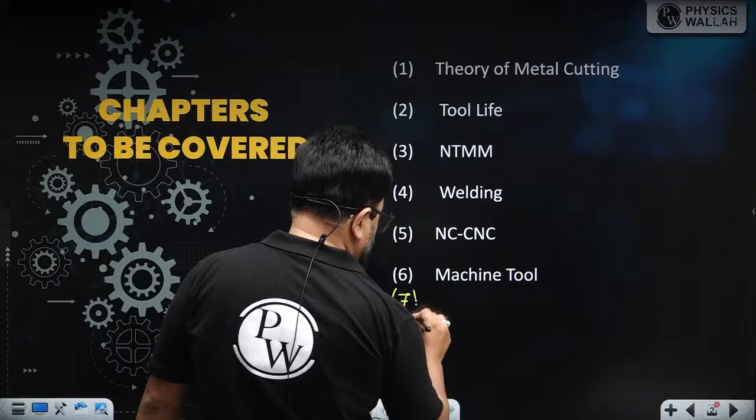Theory of metal cutting, tool life, NTMM non-traditional machining method, welding, NC, CNC, machine tool, and additive manufacturing.

So far you have covered strength of material, manufacturing process part 1, basic thermodynamics. This is for your Maha revision. So far in Super 20 you've covered strength of material, manufacturing process part 1, basic thermodynamics. Today we are going to start manufacturing process part 2. So let's start. Here's your question.

Your time starts now.

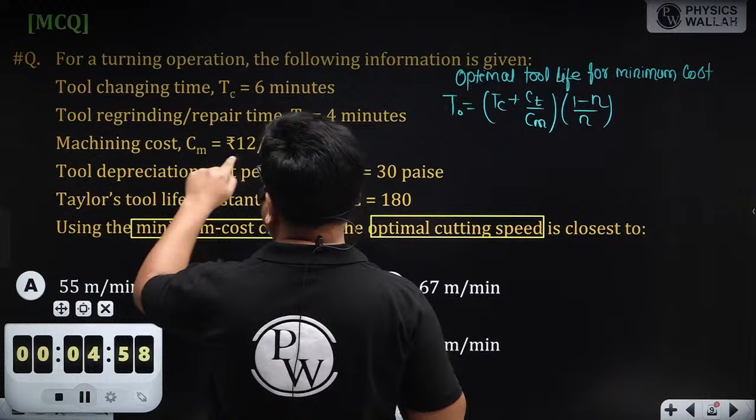Okay, now here CM is given, so let me convert that CM into rupees per minute. That is 12 by 60 rupees per minute, which is 0.2 rupees per minute. Now this is CM.

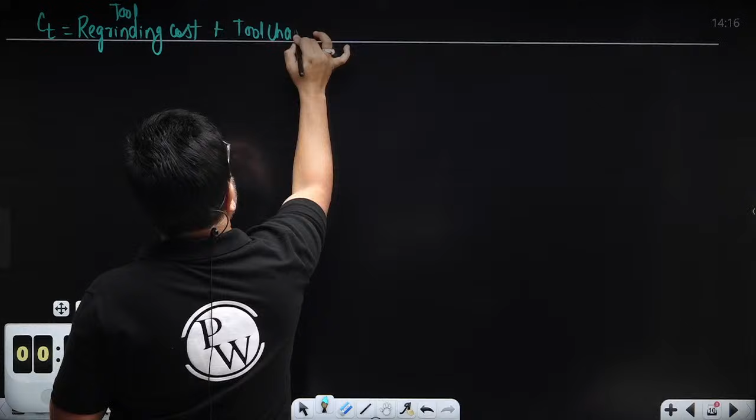Now tooling cost - I told you yesterday what is the tooling cost. Let me write it on a new slide so that you remember, if you forget what is tooling cost. CT, that is your regrinding cost plus tool changing cost plus depreciation cost. Because most of you have not given the right answer, that's why I'm writing this.

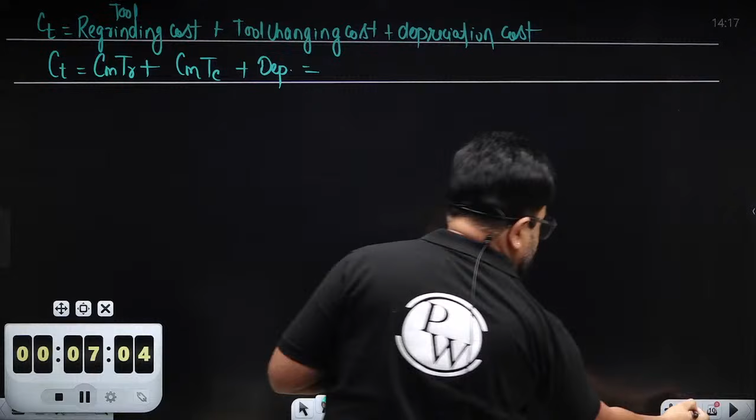Now this is CT. Here, regrinding time is 4 minutes. So who will do the repair? Basically the operator, he will do machining. So CM into TR. Who will change the tool? Operator, basically he is also doing machining. So CM into TC plus depreciation cost.

So CM, that is TR, that is 4 minutes, 0.2 into 4, plus 0.2, changing time is 6, so plus 0.2 into 6, plus depreciation 0.3 rupees, because it is in paisa, 0.3. So 0.2 into 4 plus 0.2 into 6 plus 0.3 equals 2.3 rupees per service.

Okay, now T naught is TC plus CT by CM, 1 minus N by N. T naught tool changing time, that is 6 plus 2.3 cm, 0.2, 1 minus N, that is 0.25.

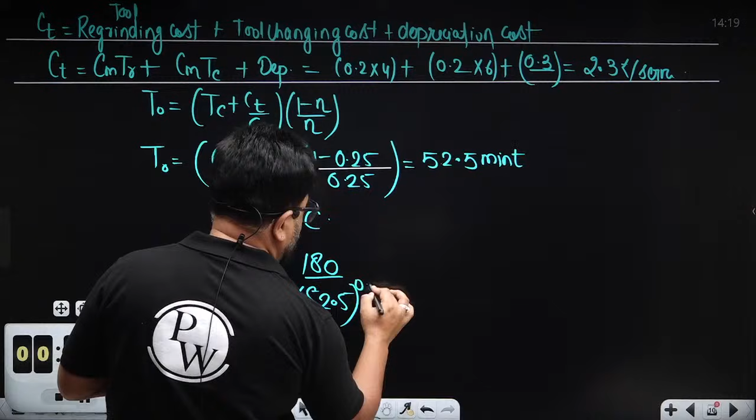So here comes T naught: 2.3 divided by 0.2, plus 6, multiply by 1 minus 0.25, divided by 0.25, that is 52.5 minute per service. So V naught T naught to the power n equal to C. C that is 180 divided by T naught, 52.5 to the power 0.25. So 180 divided by T naught to the power 0.25, so 66.87 meter per minute.

So nearby we can write 67 meter per minute, right? So option B is the right answer.

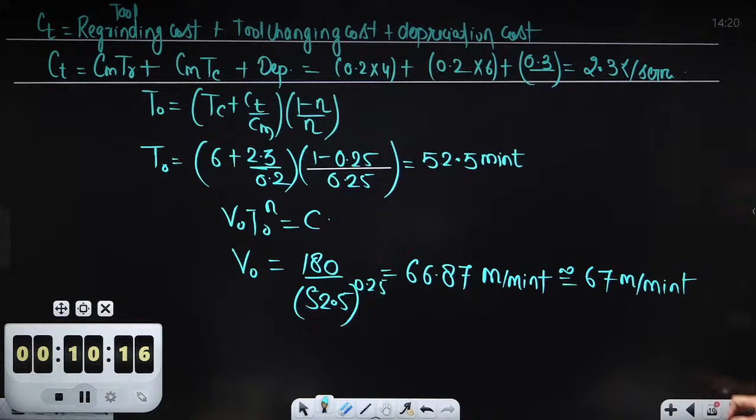Anybody has any doubt? Because most of you have given option C as answer. Aditya, Divya, Swastik, okay, Devapalli, Shiv Kumar, am I clear? And some of them have given option A also - Mukhu, Srivastava, Aditya, Kotawade. Any doubt? I have given the detailed explanation of this question. Any doubt? Shall we move? Clear? Okay, let's move.

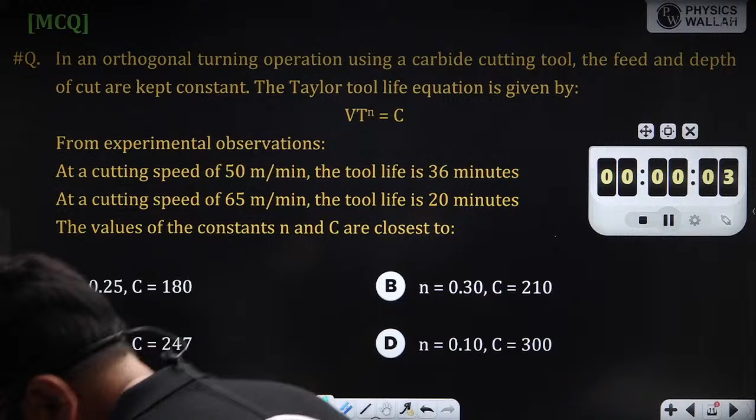This is an easy question.

Okay, Aditya, Kothavade, got it. Thank you.

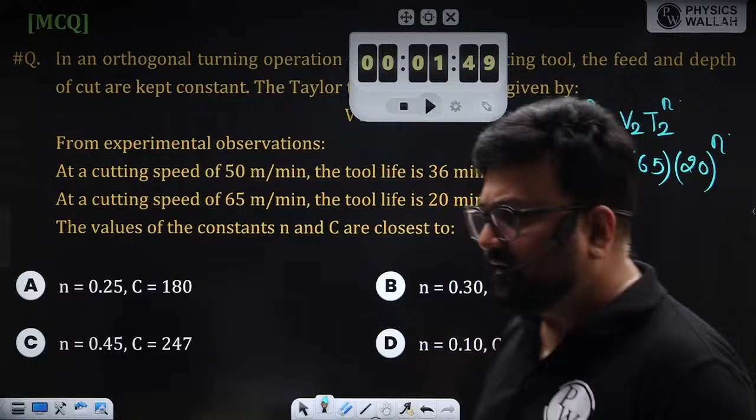You will get the value of n. Once you solve, you will get nearby value 0.45. The exact value is what? 0.446, but when you round it off, 0.45.

Now V1 T1 to the power n. So V1 50, 36, 0.45. The value of C is 247. So option C is the right choice.

You people are doing a good job.

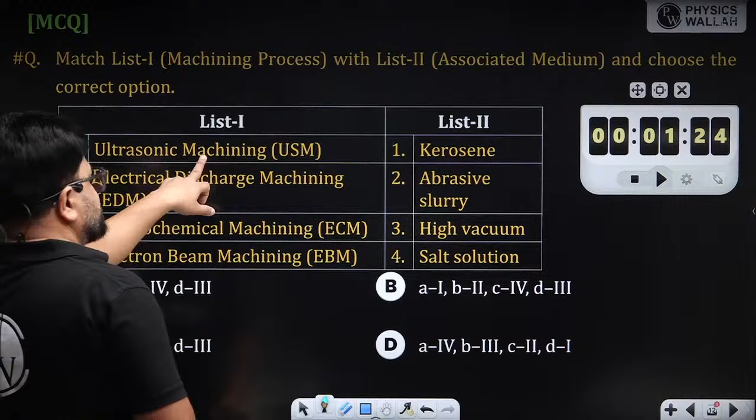Yes, so option A, okay. Ultrasonic machining, USM, you need what? Abrasive slurry, so A2, right? Electrical discharge machining needs dielectric medium, that is kerosene based oil. Electrochemical machining, we need electrolyte, that is salt solution, C. And electron beam machining required - sorry, it is 4 - and we need vacuum. So option A is the right choice. Right? Next.

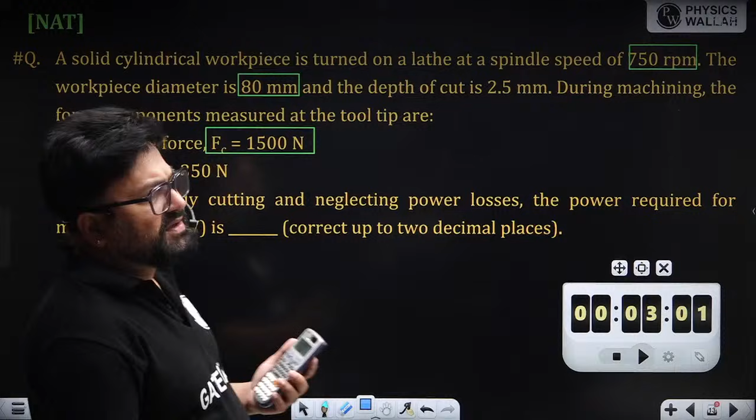It is simple, that is cutting force into cutting velocity. So what is the cutting velocity here? That is pi dn divided by 1000. Pi d, diameter is 80 mm and rpm is 750, divided by 1000. Now this is meter per minute, divided by 60, so it is meter per second.

Now power consumption is what? Cutting force into velocity, that is 1500, pi d n, divided by 1000 into 60. So 1500 into pi into 80 into 750, divided by 1000, divided by 60. So it comes to 4.712 kilowatt.

In this easy question, you people are doing mistakes. Okay, so please pay attention. This is a very easy question.

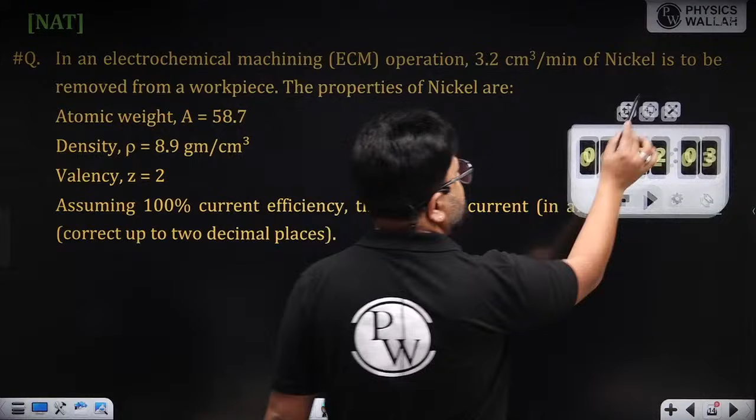Okay. In electrochemical machining operation, 3.2 centimeter cube per minute of nickel is to be removed from workpiece.

The property of the nickel, assuming 100% current efficiency. So MRR equal to I into E divided by F into rho.

That will be centimeter cube per second. Here MRR is centimeter cube per minute. So 3.2 divided by 60 equal to I divide by E, that is atomic weight 58.7, valency is 2, F is 96500, multiply density, that is 8.9, right?

So when you solve, yes, so 3.2 divided by 60, multiply by 96500, multiply by 8.9, divide by 58.7, multiply by 2. So yes, I is 1560.65 ampere.

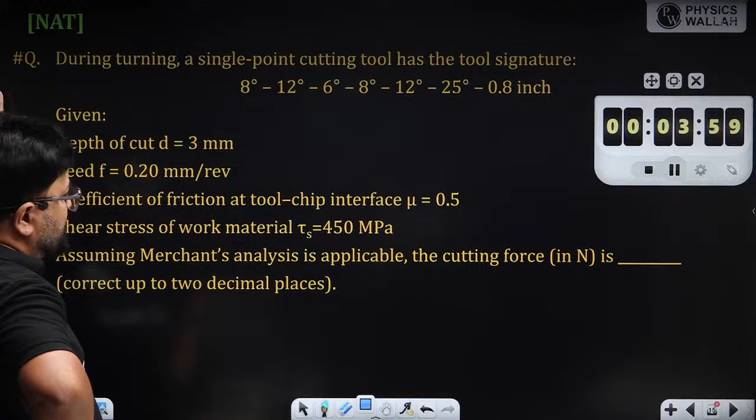During turning, a single point cutting tool has tool signature given. Depth of cut D, feed is 0.2 mm per revolution, coefficient of friction at the tool chip interface 0.5. Shear stress of the work material is 450. Assuming merchant analysis is applicable, the cutting force is.

We need to find the cutting force. Okay, in the comment box, let me know - please tell me which system is that. Is it ASA or ORS? At least tell me in the comment box. Is the angle ASA system or ORS system? Okay, very good, yes, the system is ASA. The system is ASA, very good.

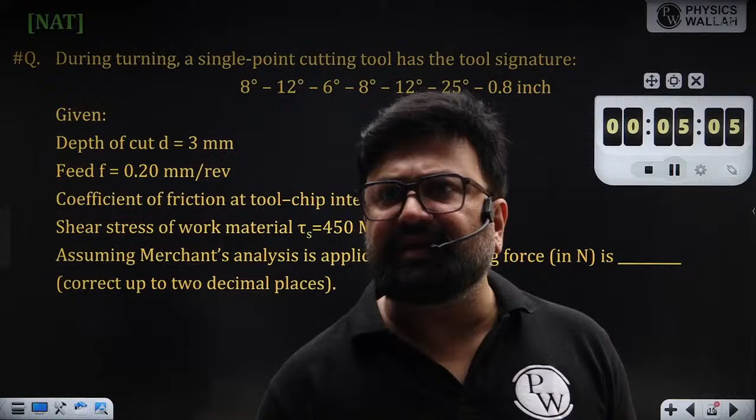So, to find the - because somehow we need the shear angle - okay, somebody has solved 698. I think it is 6 nearby the answer, 698 nearby, not exact, right, Saurav? So please check your calculation again. You are nearby but not the exact one.

So we need the shear angle. For shear angle, we need orthogonal rake angle. We need orthogonal rake angle first of all, then we need shear angle. But in this question, orthogonal rake angle is not given.

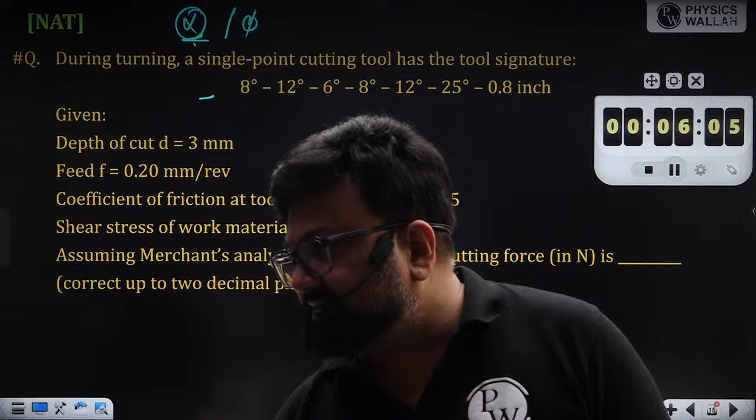So how can we find it? By the interconversion formula between ASA and ORS, right? By the interconversion formula between ASA and ORS. Are you getting my point? So what is the interconversion formula? Tan alpha equal to... so we can write tan alpha equal to

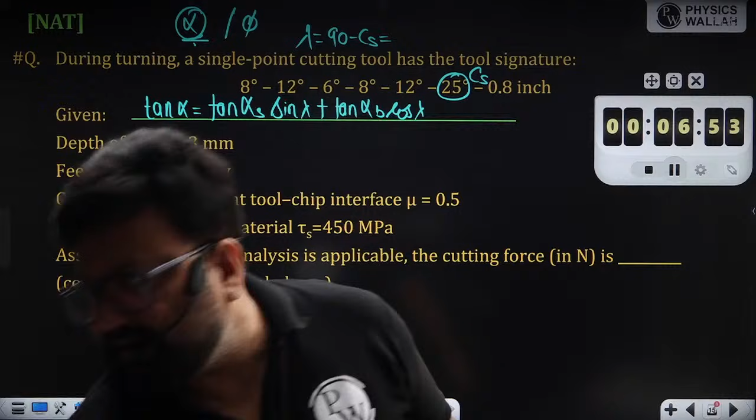tan alpha s, that is side rake angle, into sine lambda plus tan of back rake angle cos lambda. What is lambda here? This is CS. So lambda is 90 minus CS. So here comes your lambda, that is 90 minus 25, that is 65 degree. So when you calculate this, tan alpha...

now this is back rake angle and this is side rake angle. So tan of alpha is tan of 12 and sine of 65 plus tan of 8 cos of 65. So you will get the value of alpha. Tan of 12 multiply sine of 65 plus tan of 12 multiply sine of 65 plus tan of 8 multiply cos of 65, right?

Shift tan inverse of the answer. So alpha is 14.14. Are you getting this? Alpha is 14.146, or if I round off, 14.15 degree. And now we need the shear angle.

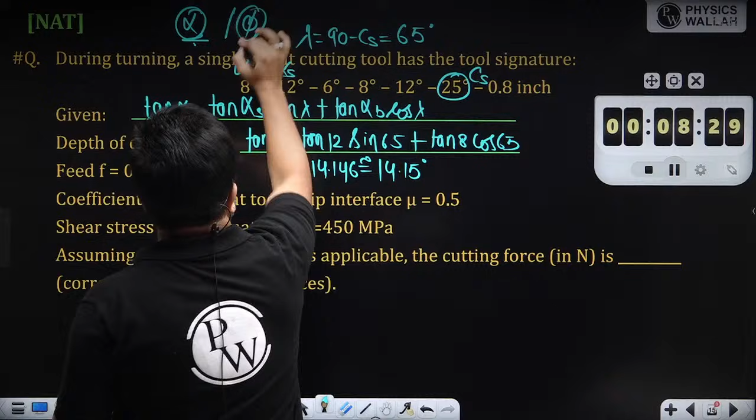But for shear angle, if we apply the formula tan phi equal to r cos alpha divided by 1 minus r sin alpha, there is no r given. So by this formula we cannot calculate phi. So what to do? In that case, it is given that merchant analysis is applicable. So phi is 45 degree plus alpha by 2 minus beta by 2. Here mu is given, so...

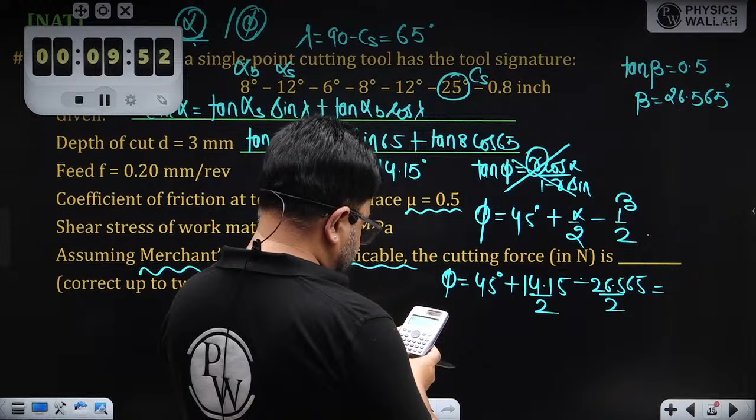you can write that tan of beta equal to 0.5, right? So beta equal to 26.565. So here we get the value of phi: 45 degree plus alpha by 2, that is 14.15 by 2, minus 26.565 by 2. That is 45 plus 14.15 divided by 2 minus 26.565 divided by 2, that is 38.792.

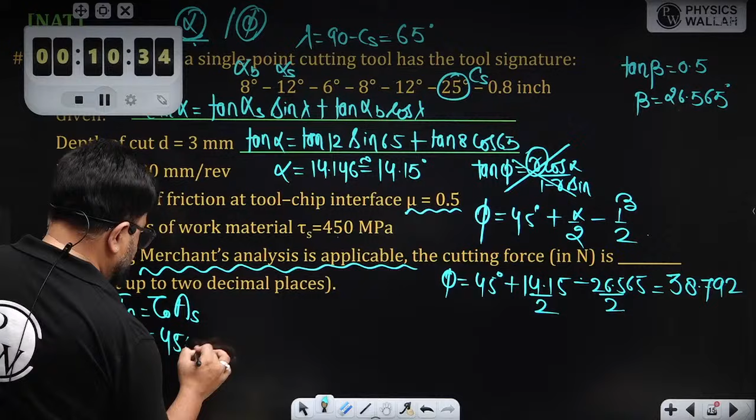Is that clear? Is that clear? So this is the shear angle value. Now can we find the shear force? Shear force is Fs equal to tau naught into As. So tau naught is given as 450 megapascal, that is Newton per mm square, 450. As is what? W T naught by sin phi.

Now depth of cut and feed. Now this is turning, so we can write 450 multiply FD divide by sin phi. In turning we can write FD also. So what is shear force? Feed is given, what is that? 0.2. D is 3. Divide by sin 38.792. So here comes the shear force.

So here it is 450 multiply 0.2 multiply 3 divide by sin of phi, that is 430.964 Newton. Right, now you have the shear force. Now what will be the next step? We can find R, right?

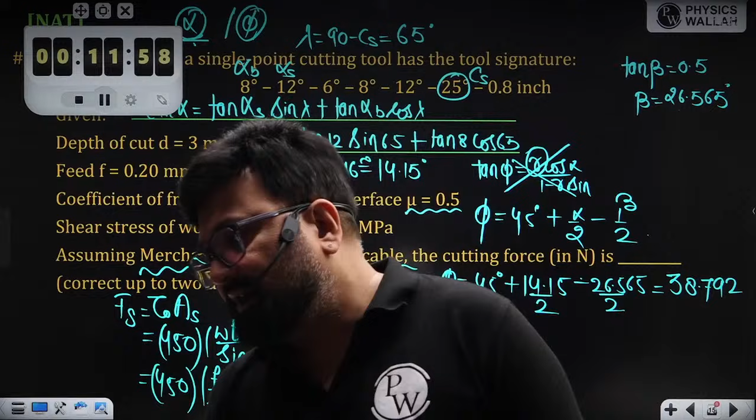We can find the R, and actually what is being asked, let me recorrect, the actual question is the actual cutting force. Is that okay? The actual cutting force, that is what? R. Sorry for the inconvenience. And because you cannot find it otherwise, if you have calculated the R, you have calculated the cutting force.

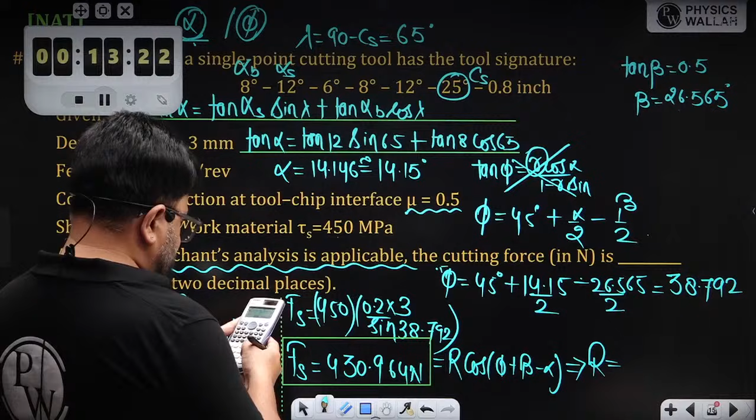Now let me calculate Fs. Fs equal to R cos of phi plus beta minus alpha. So it will give R. So the answer divided by cos of phi, that is 38.792, phi plus beta 26.565 minus alpha 14.15. So R is 687.88 Newton. This is the actual cutting force, but if you are calculating FC, then what is FC?

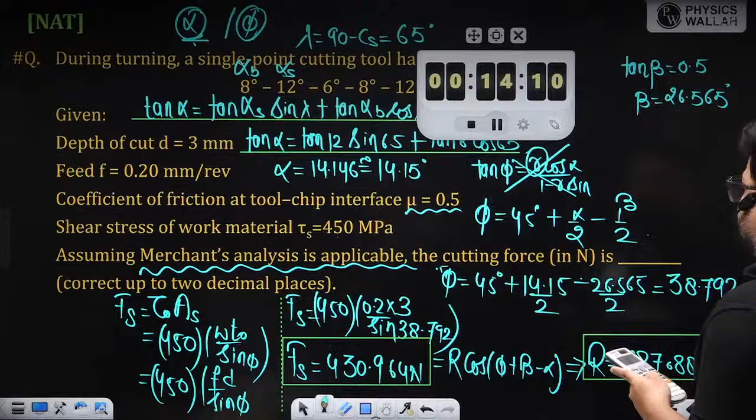FC is R cos of beta minus alpha. So 687.883 cos of beta 26.565 minus 14.15. So this is the cutting component: the answer multiply cos of 26.565 minus 14.15, so 671.797 Newton.

Very good. Is it clear? Is it clear? Everybody?

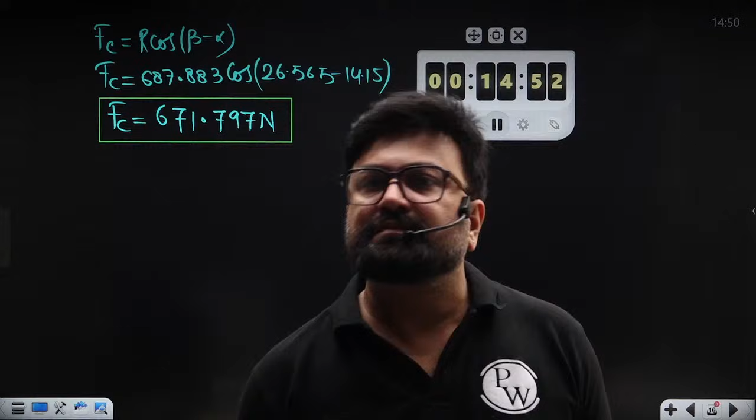Although the question is lengthy, but we need to do practice here. Okay, we need to do practice here. In this question, various formulas come, right? So first is this tan alpha formula. Second is your merchant analysis, right? And third is your merchant circle formulas. So three to four formulas come in this question. This question may be asked in MSQ type also.

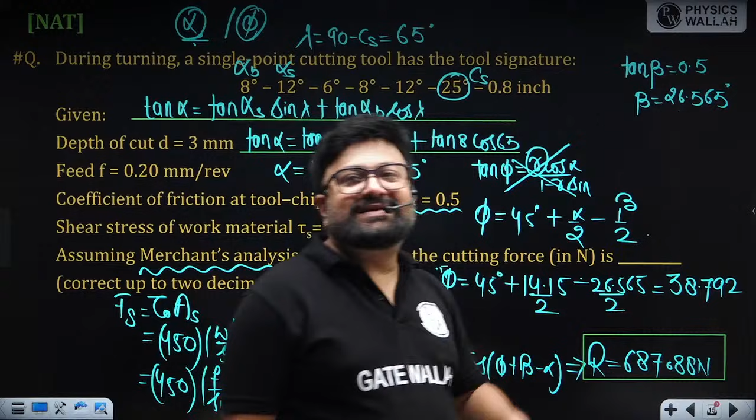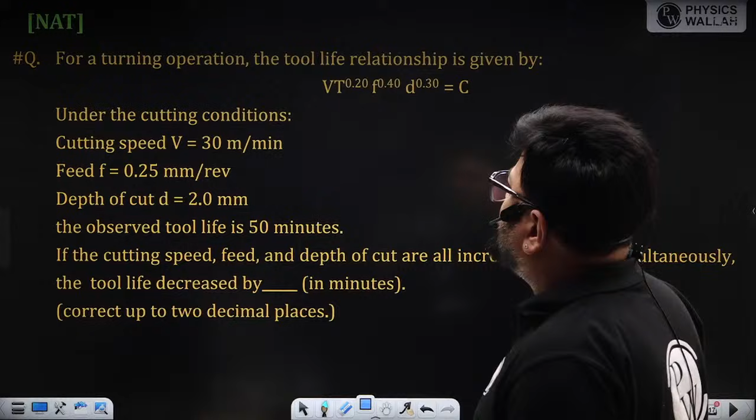For a turning operation, the tool life relationship is given under the cutting conditions of cutting speed, feed, and depth of cut, with the observed tool life. If the cutting speed, feed, and depth of cut are increased by 20%...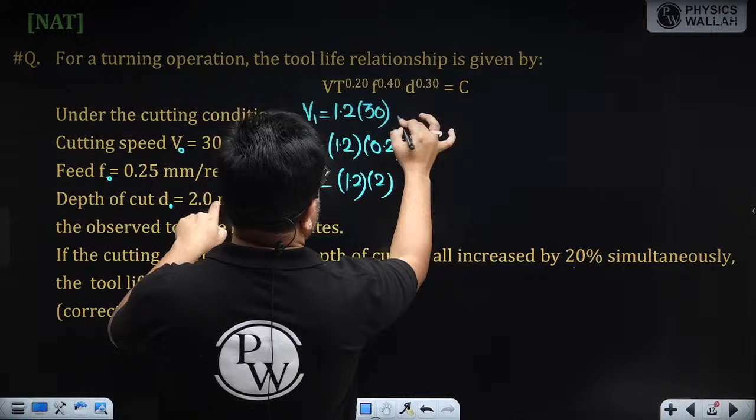So basically this is V naught, F naught, D naught and T naught, right? And if you increase the cutting velocity V1 by 20%, that is 1.2 times of 30. F1 is 1.2 times of 0.25, and D1 is 1.2 times of 2. So that much will become.

Now this is equal to, let's calculate it here. We are increasing it by 20%. So 1.2 into 30 is 36. 1.2 into 0.25 is 0.3 mm, and 1.2 into 2 is 2.4 mm.

Now here this is V naught, T naught to the power 0.2, F naught to the power 0.4, and D naught to the power 0.3, equal to V1 into T1 to the power 0.2, F1 to the power 0.4, and D1 to the power 0.3.

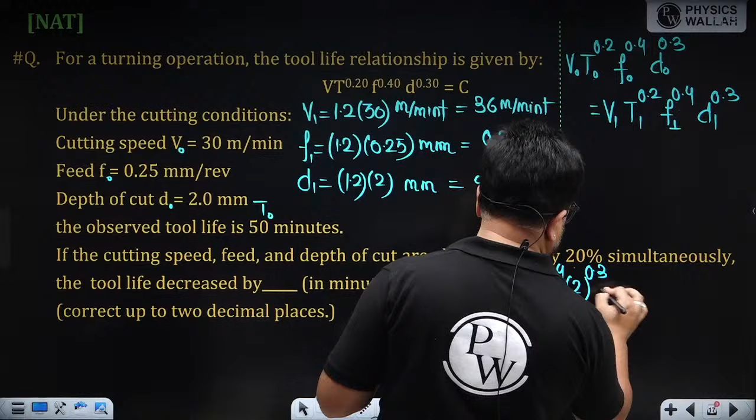So we can find T1. Here V0 is 30, multiply T0, that is 50, to the power 0.2, F0 is 0.25 to the power 0.4, and D0 is 2 to the power 0.3, equal to V1, that is 36, multiply T1 to the power 0.2, F1, that is 0.3, to the power 0.4, and D1, that is 2.4, to the power 0.3.

So here we calculate T1. 30 multiply 50 to the power 0.2 multiply 0.25 to the power 0.4 multiply 2 to the power 0.3, the answer divide by 36 multiply 0.3 to the power 0.4 multiply 2.4 to the power 0.3.

So the answer to the power 1 divided by 0.2. So it comes to 10.615. Is it correct? First let me know, is the value of T1 correct?

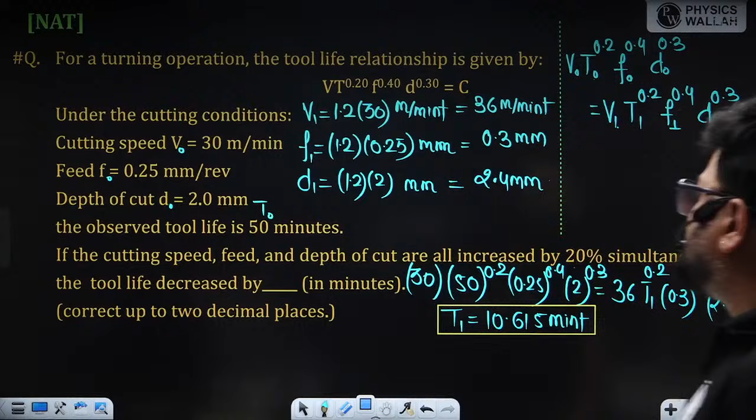Now he is asking by how much the tool life decreased, that is change. That is T1 minus T0, decrease is 10.615 minus 50, so minus 39.384 minutes. The minus sign shows that tool life decreases by 39.384.

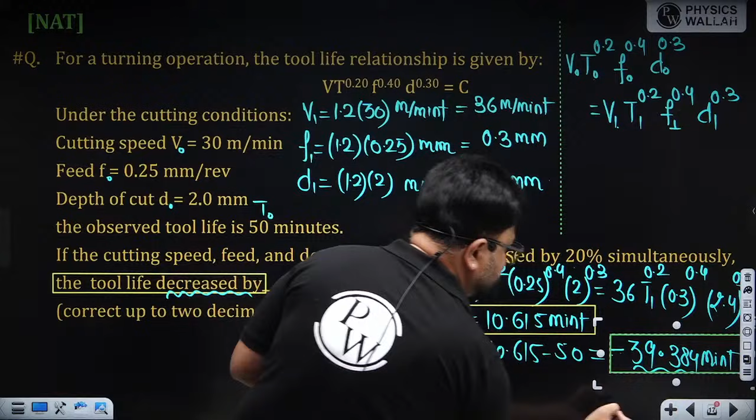Is the solution clear? Yes. Is the solution clear? Yes. Is the solution clear? Yes, okay.

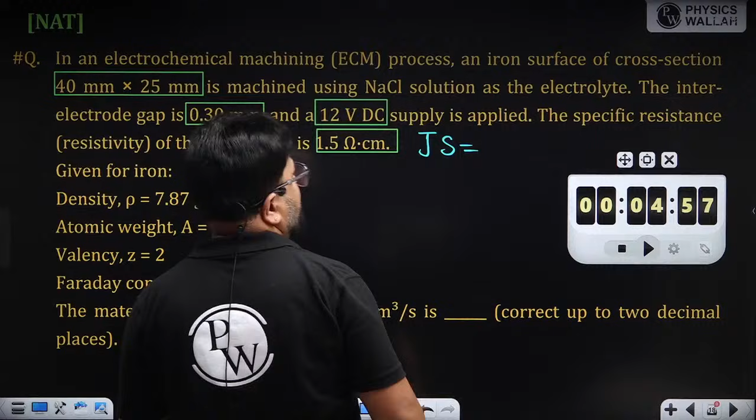So for material removal rate, what do we need? I, current, is not given. So current density into specific resistivity, applied voltage minus drop voltage divided by Y. So J, that is I by A, into S, V naught.

It is not given, so we can keep it as 0. Now I by A, A is 40 mm into 25 mm, so I am writing 4 into 2.5 centimeter square, multiply 1.5 ohm centimeter, 12 divided by Y, 0.3 mm, so 0.03 centimeter. Here you will get the current value.

So 12 divided by 0.03 multiply 4 into 2.5 divide by 1.5, that is 2666.66 ampere.

Now MRR is I E by F rho. So I is 2666.666, E, that is atomic weight 56 by 2, divide by F, 96500, density 7.87. Answer: multiply 56 by 2 divide by 96500 multiply 7.87.

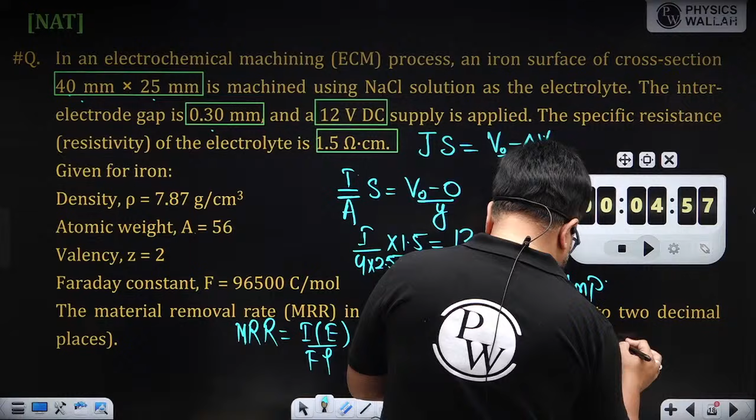So MRR is 0.0983 centimeter cube per second. Aman Kumar, it is 0.09, not 0.9. Okay, Akshat, very good.

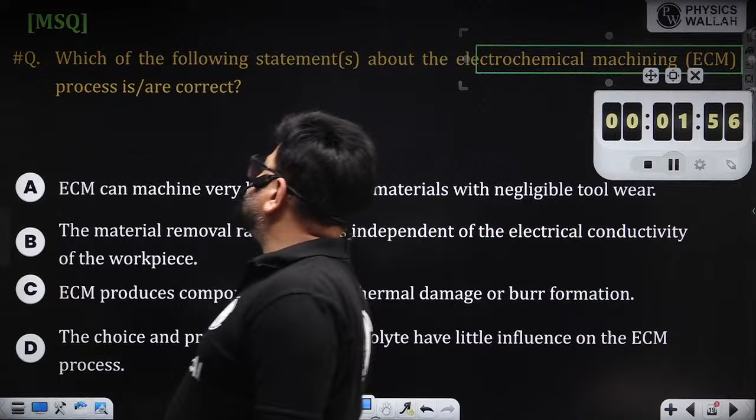So which of the following statements about the electrochemical machining process is/are correct? ECM can machine very hard and tough material with negligible tool wear. Because of this statement about negligible tool wear, you can say option A is right.

The material removal rate in ECM is independent of electrical conductivity - the ECM produces components without thermal damage or burr formation, yes. The choice and property of the electrolyte have little influence on the ECM process - no. So A and C are the correct answers. Okay, A and C are correct. Now the next.

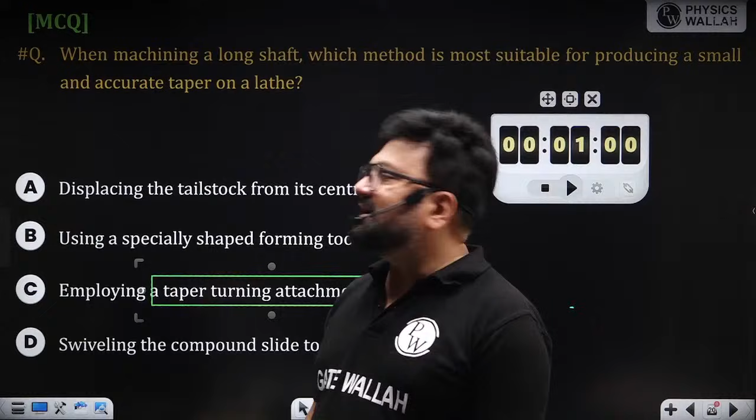No, my dear, if you displace the tailstock, then surface finish... Please pay attention here. Actually in this option, what the examiner did is given employing a taper turning attachment. You have seen that taper turning attachment is an advanced tool which provides accurate taper and good surface finish. You can produce either a small taper or large taper, but the taper will be accurate if you use a taper turning attachment. Are you getting my point?

If the taper turning attachment is not available, then you can use either what?

Either by swiveling the compound slide, or by offsetting the tailstock, or by using a form tool - these are methods for accurate taper on a lathe. So option C is the right choice.

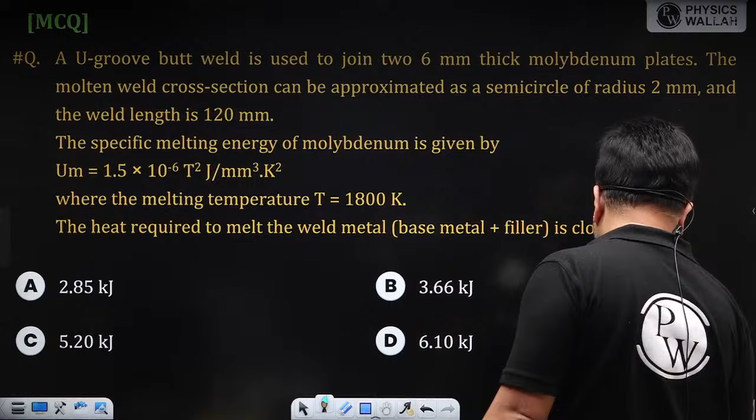This question is straightforward. U-groove is in 6 mm thick molybdenum plate. The molten weld cross section area is approximated as semicircular of radius 2 mm, and weld length is 120 mm. Specific melting energy of molybdenum is given. So the required melting heat is what?

That equals area of the weld metal into length. This is equal to area of weld metal, pi r square, that is pi 2 square by 2 into L, that is 120. So this is the volume.

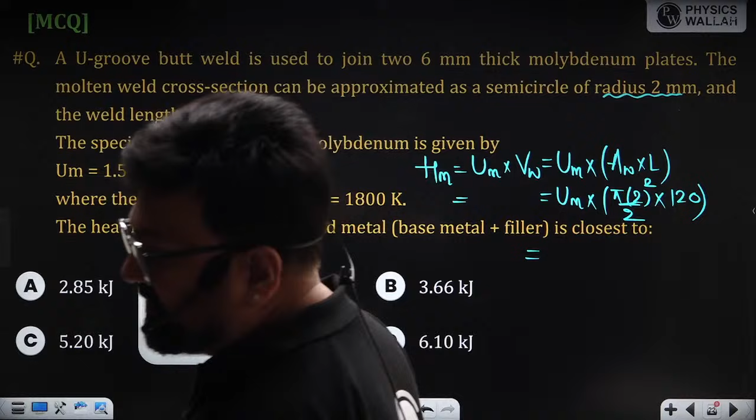Simple, straightforward question - if I give the efficiency, then it will become tricky. So here, pi into 2 square divided by 2, into 120. This is 1.5 into 10 to the power minus 6, t square, that is 1800, multiply 753.9822 joule.

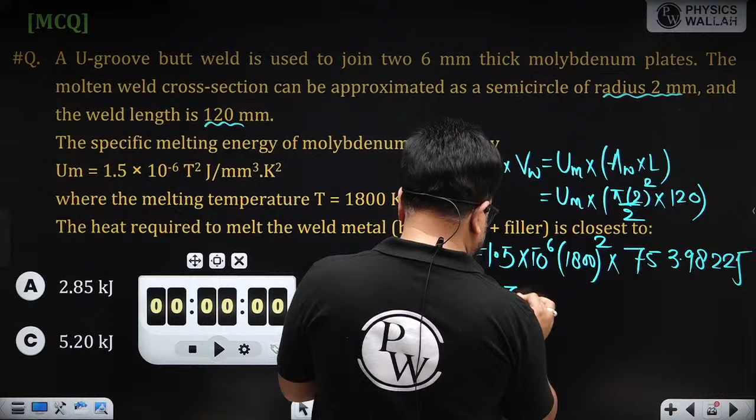Multiply 1800 square multiply 1.5 into 10 to the power minus 6. So 3.664 kilojoule, option B. Question is pretty simple.

Huh. B. Good, the answer is B. Okay, here.

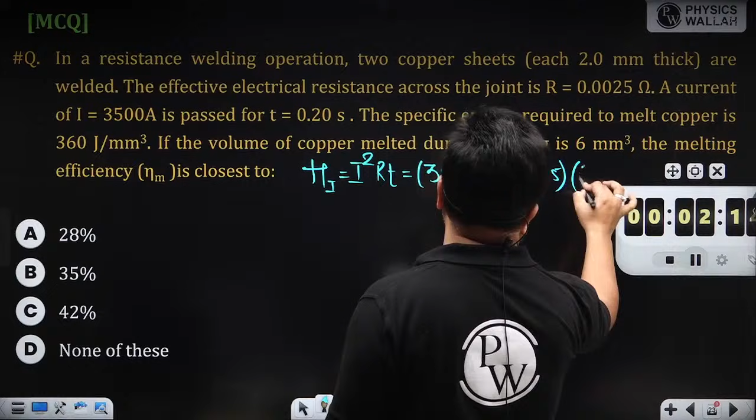H input is I square RT. I is 3500 square, R is 0.0025, T is 0.2, in joule. Now H actual is the volume of the weld pool, the resistance, and current is passed through.

The volume into volume of the weld pool. So 360 into 6, melting efficiency, that is HA by HI into 100. HA is 360 into 6 divide by 35.

Square 0.0025, 0.2 multiply 100. So 360 into 6 divide by 3500 square multiply 0.0025 into 0.2, answer into 100, that is 35.265%. Option B is the right answer.

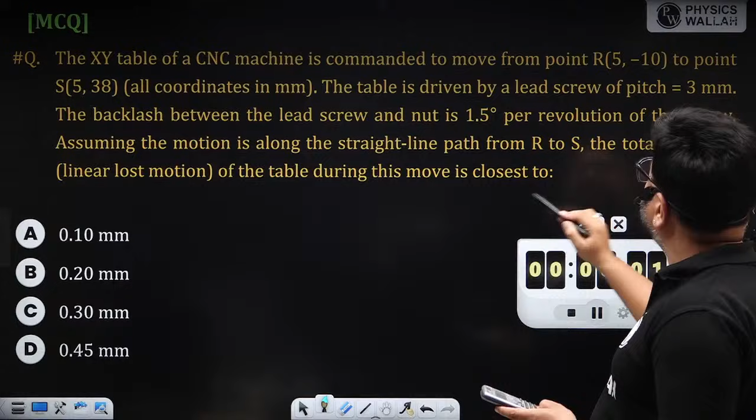Next. Very good. Here.

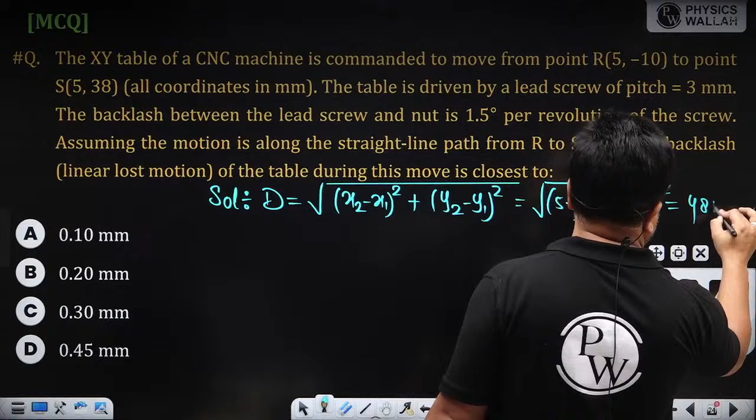Number of revolutions - pitch is given as 3 mm. Means for 3 mm linear distance, you need to give 1 revolution. But if you move by 48 mm, then how much revolution is required? 48 by 3, that's 16 revolutions.

Now in each revolution, there is a backlash of 1.5 degree per revolution. In degree, total backlash for 16 revolutions: theta t equals 16 multiply 1.5 degree. So 16 into 1.5, 24 degree backlash.

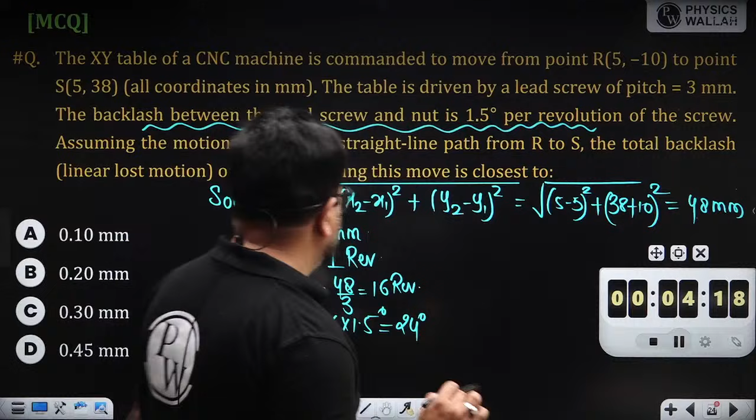Now we need to convert this into linear backlash. We know that if we give 360 degree rotation, then 3 mm linear displacement. And if there is 24 degree backlash, then how much will it become? 24 divide by 360 multiply 3, that's 0.2 mm.

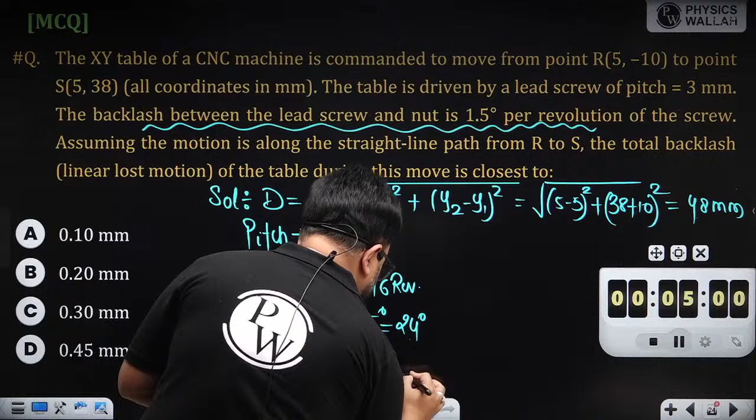Answer B. Next. Yes, okay good, very good. Here, you need to find the tangential force.

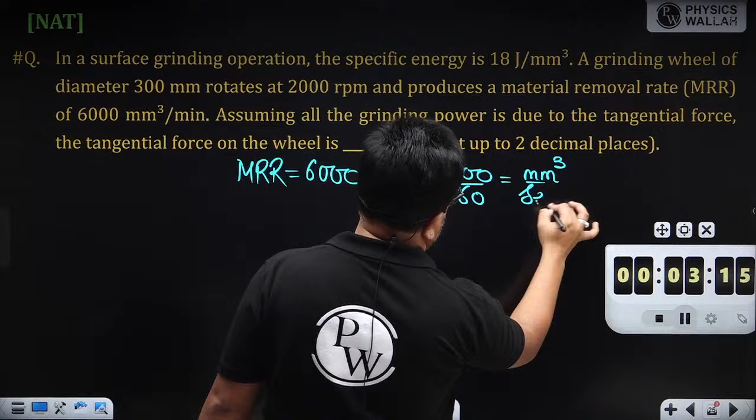MRR is given as 6000 mm cube per minute. 6000 divided by 60, that's 100 mm cube per second. Now specific power energy.

Specific power energy is 18 joule per mm cube. That means work done, that is power, divided by MRR.

So here this MRR is 100, so the grinding power is 18 into 100, so 1800 watt will be the power.

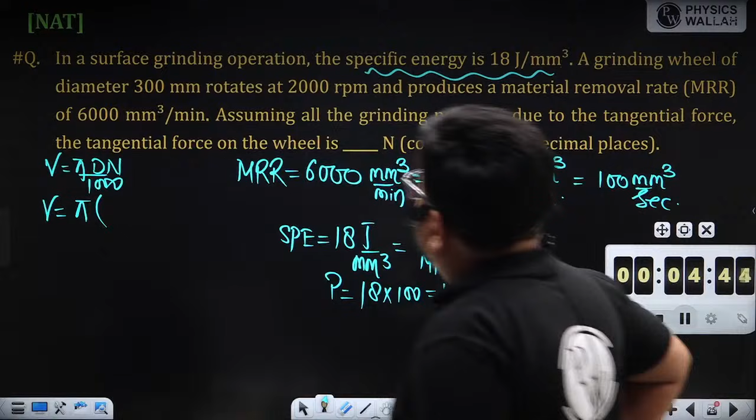So 300 into 2000 by 1000, 60, so meter per second. Here comes the V.

Okay, if I keep it as it is, power is cutting force into velocity, that is 1800 into cutting force into cutting velocity, that is pi 300 into 2000 divided by 1000 into 60. So 1800 into 1000 into 60, divide by pi into 300 into 2000, so it gives 57.29 Newton.

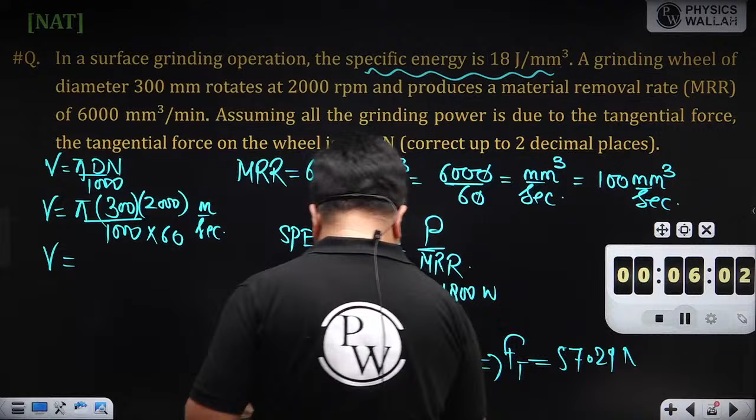57.29 Newton, okay, clear? Very good. Next.

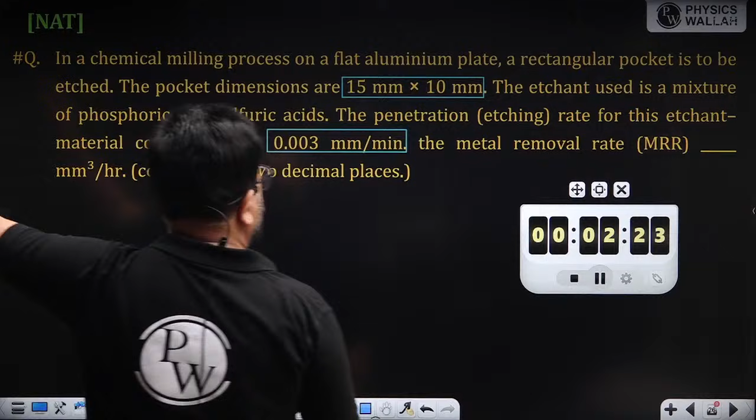Metal removal rate is cross section area multiplied by 0.003 mm, which gives mm cube per minute. So this is 15 into 10 into 0.003.

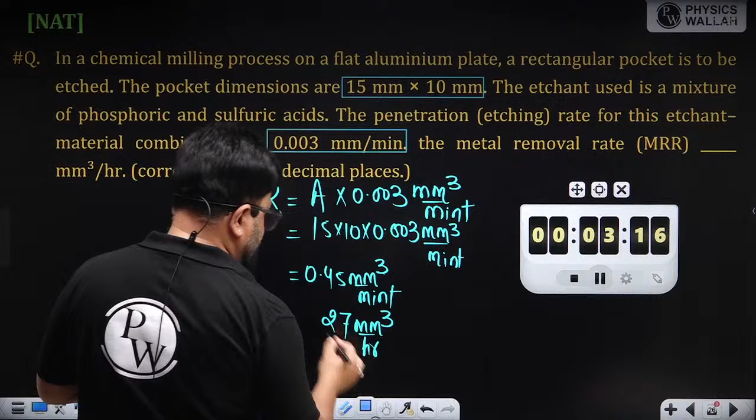Answer multiply by 60 per hour, right? So this is the right answer. Okay, now next question.

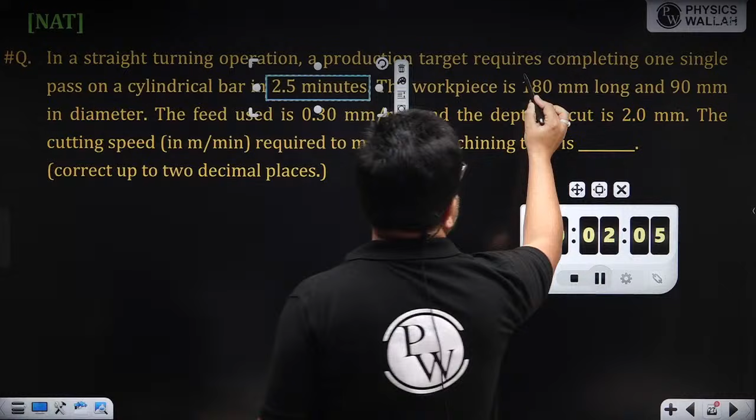The workpiece is 180 mm long and 90 mm in diameter. The feed rate and depth of cut are given. The cutting speed is required.

So here, machining time equals L by f into N. T is given as 2.5, L is 180, divided by feed that is 0.3 into RPM. So here comes the RPM.

So RPM is what? 180 divided by 0.3 divided by 2.5. So RPM is 21.6. Is it 21.6, right? So RPM is 21.6 revolution per minute.

Cutting speed is pi d N by 1000. So pi, diameter is 90, 21.6 divided by 1000. So pi into 90 into RPM. So 6 point...

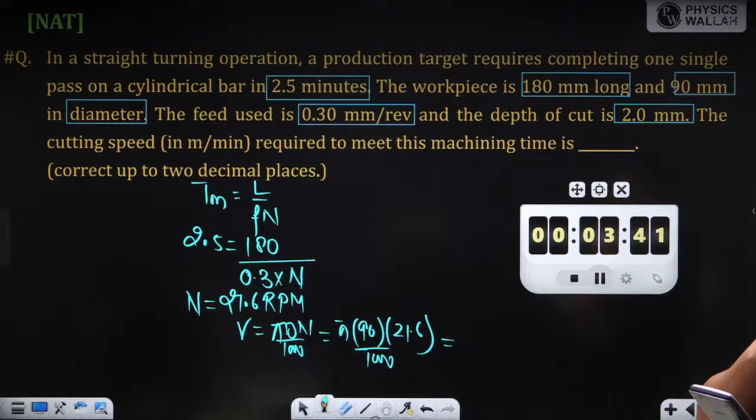I think I did some mistake. RPM is what, 21.6? Yes, I think I did some mistake now. I did some mistake. Calculation mistake.

Here 2.5 is the machining time. RPM is, yes, L is 180 divided by 0.3 divided by 2.5. RPM is what? 240. 180, 0.3 into N, RPM.

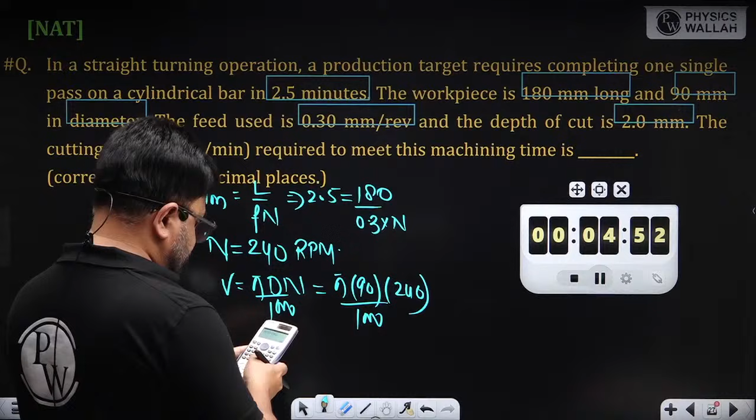Now here, pi d N by 1000. So pi, diameter is 90, 240, divided by 1000. Pi d N by 1000 gives 67.85 meter per minute. Okay.

Now the last question is from stereolithography. In stereolithography, the following data is given below.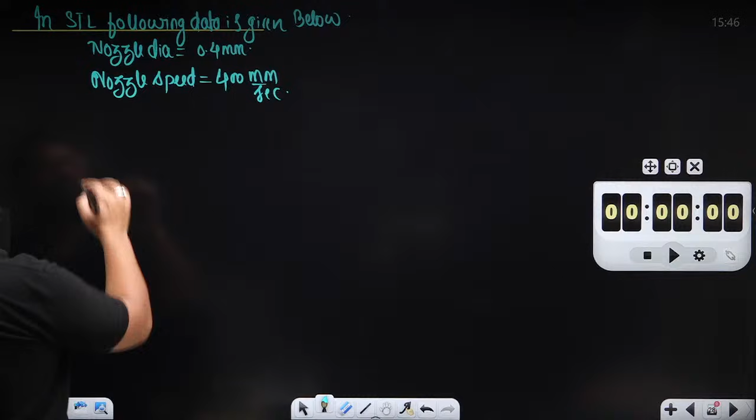Nozzle diameter is 0.4 mm. Nozzle speed is 400 mm per second, right? Okay.

Neglect repositioning time, then find the building time of the part in seconds. The part is what? Let me draw it here.

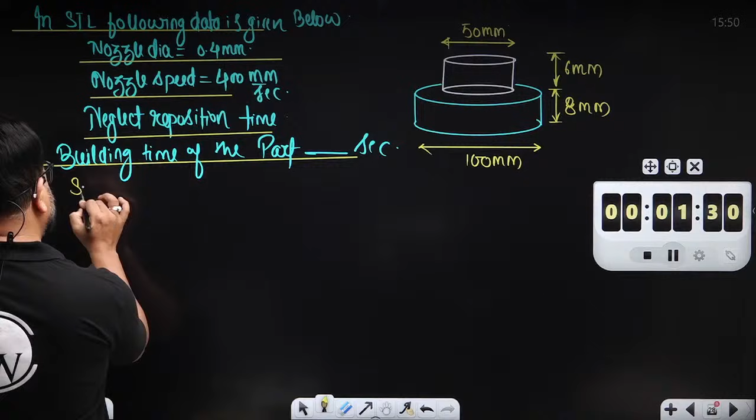Look, if thickness is not given, if layer thickness is not given, then you can consider the nozzle diameter as the thickness of the layer. You can take it if thickness is not given. So nozzle diameter is 0.4, right? Now, this is 0.4 mm.

Now, this is part 1, this is part 2. Now for part 1, the first surface area is what? That is pi by 4 d square, pi by 4 d square, that is 100, right? Now the required time for the first layer is Ai by V into D.

So pi by 4 d square divided by V, that is V is 400, multiply diameter is 0.4, right? That much second per layer, okay. Now number of layers for part 1 is what?

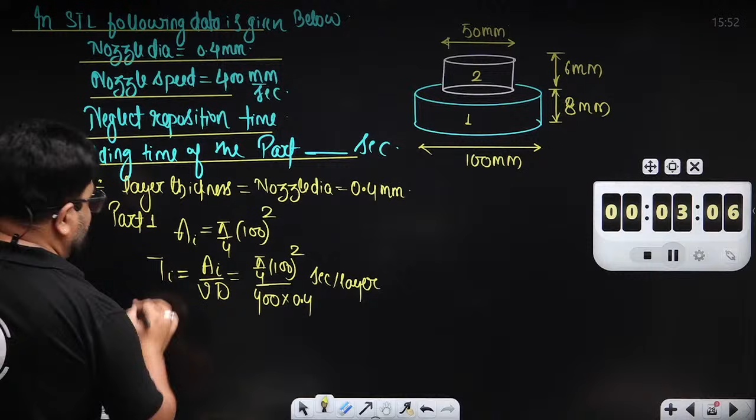That is 8 mm divided by the layer thickness. I can assume nozzle diameter 0.4, so 20, right? 20 layers. So total time for part 1 is pi by 4 d square divided by 400 into 0.4 into 20.

Similarly for part 2, the area is pi by 4 d square, that is 50 square. The time required for the first layer is Ai by V into D. What is Ai? That is pi by 4 50 square divided by V, that is 400 into nozzle diameter.

Nozzle diameter is 0.4. Number of layers is 6 divided by 0.4, that is 15 layers.

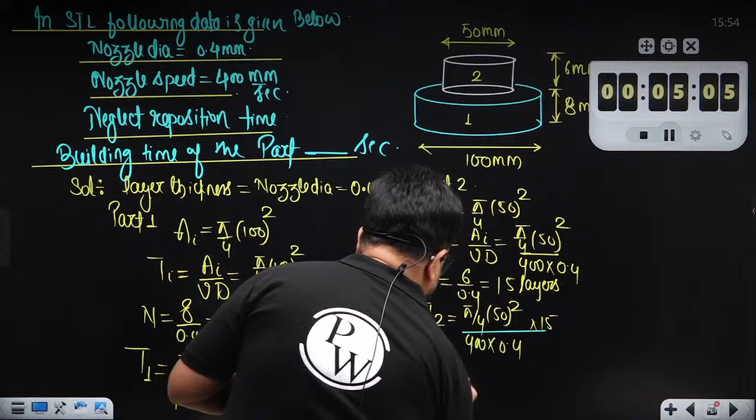So T2 is pi by 4 50 square divided by 400 into 0.4 into 15. Now T equals T1 plus T2.

So what is T1 here? Pi by 4 into 100 square, answer divide by 400 into 0.4, answer multiply 20, gives 981.747 seconds.

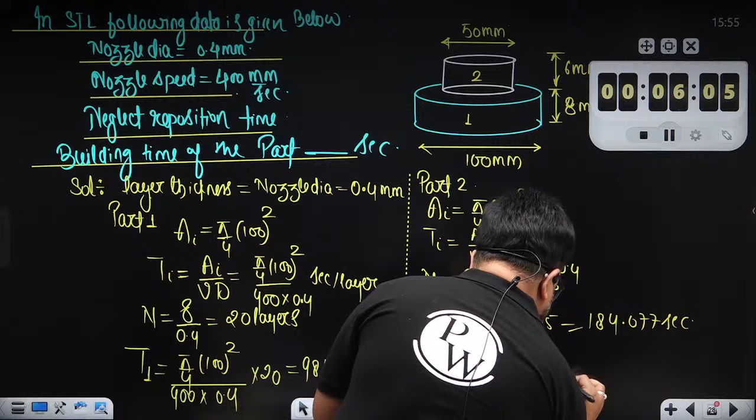And here, pi by 4 50 square, answer divided by 400 into 0.4, answer multiply 15, gives 184.077 seconds. Total 981.747 plus that gives 1165.824 seconds.

Okay, yes, very good. So that's it for today's session.